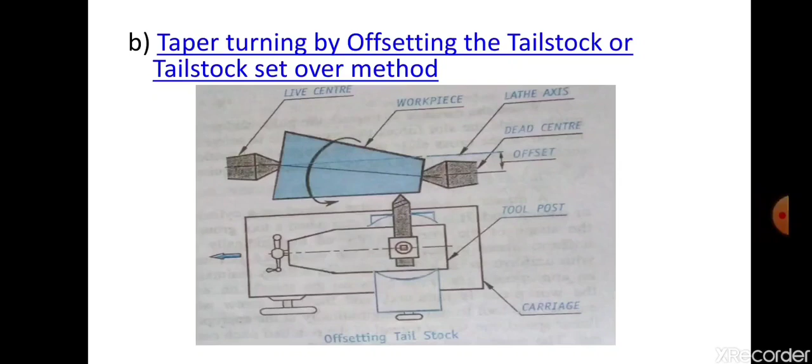Okay, specification of lathe. So what do you mean by specification of lathe? Specification of lathe means we have to give the details about the machine. For example, what will be the maximum diameter of the workpiece that can be fitted into the lathe machine? What is the maximum length of the workpiece that can be fitted into it? That is the meaning of specification of the lathe.

So for a given machine, what will be the minimum diameter? What could be the maximum diameter of workpiece that can be fitted into it? What will be the maximum length of the workpiece that can be fitted into that machine? So all these will tell you the specification of it. In addition to that, we can also say what will be the maximum speed at which it will rotate. Okay, so all these things will give you the specifications of lathe.

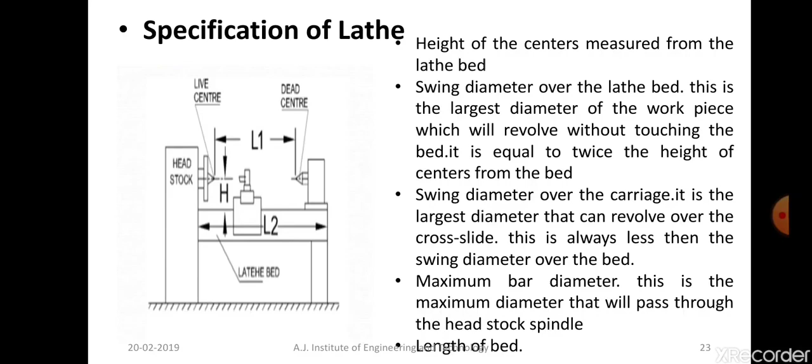Okay, so we will start with the milling machine. So what is milling actually? Milling is a manufacturing process in which the excess material from the workpiece is removed by a rotating multi-point cutting tool called the milling cutter. Okay, so you can see the difference between lathe machine and milling machine.

In lathe machine, as I've told you, the clear difference here, the workpiece is rotating. Workpiece is rotating, tool is stationary. Tool is not rotating. Tool is only made to move forward and towards longitudinal direction. Actually, it is moved by the carriage assembly. Tool will be stationary there, right? So you are feeding the tool against the rotating workpiece. That concept is lathe. But what about milling here?

In milling, as I told you, you have a revolving cutter which is having teeth, which is the tool actually. So the wheel is rotating, or in other words, the tool is rotating here, and the workpiece is stationary. So you are feeding the workpiece against the rotating tool, quite opposite to that of lathe, isn't it? In lathe, workpiece is rotating, you are feeding the tool against the workpiece. Here, the tool is rotating, you are feeding the workpiece against the tool.

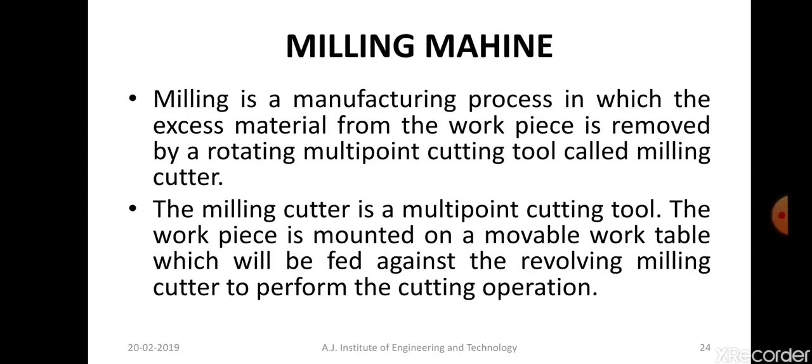Okay, so this is important. This question also is generally asked. What is the principle of milling? How milling is done?

So I have already explained this actually. So just in brief, I'll explain it one more time. The workpiece which is mounted on the table can be fed either in the direction opposite to that of the cutter or in the same direction of the cutter. There are two possibilities, isn't it? You have the work table, you have the milling cutter which is rotating. So there are two ways in which you can actually feed the workpiece into the tool. One,

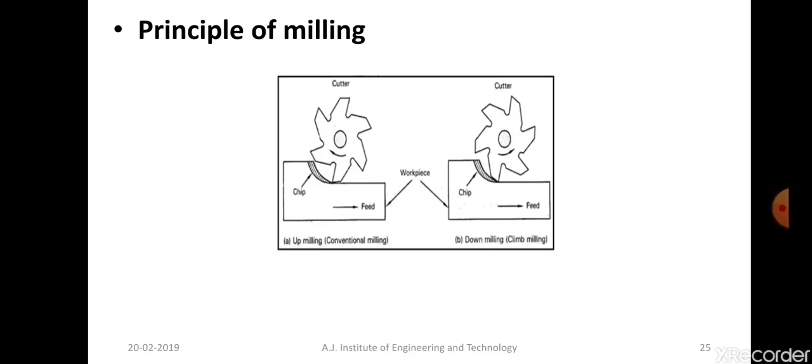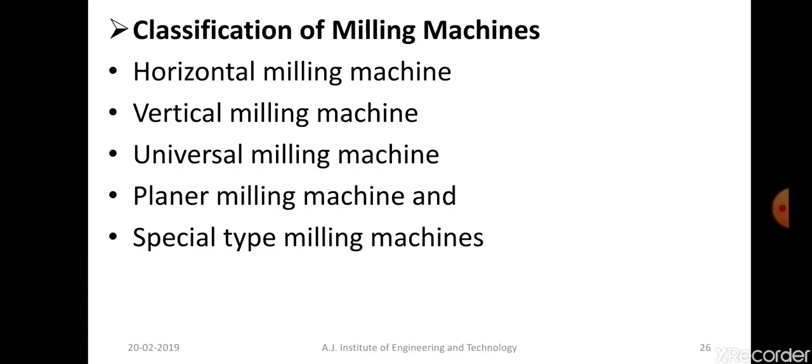Okay. So next we have classification of milling machines. There are different types of milling machines. The first one is the horizontal milling machine. The second one is the vertical milling machine. Then universal milling machine, planer milling machine, and special type milling machines. We are not going to study all of them, but in the syllabus you have to study the horizontal milling machine and vertical milling machine. Both of them are important. Generally one of them is asked in the examination, either horizontal milling or vertical milling.

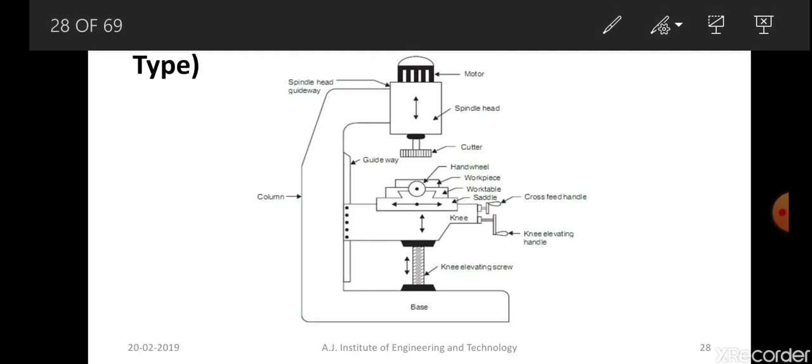So you have an elevating screw, so there is a provision to rotate the handle. There's a lever by which, when you rotate it, the whole of the knee can be lifted upwards and downwards. Okay, I hope you understand what I'm saying. So the whole of the knee along with the saddle and the table can be moved upwards and downwards.

That means when the milling cutter is rotating, there is no provision for the cutter to go up and down here. It will be rotating in the arbor itself, but wherever you want, the workpiece or the work table can be moved. That means the work table can be moved upwards till the cutter, so that the cutting action takes place. And there is also provision for the work table or the saddle to be moved in a linear direction also.

As you can see there, the arrow marks are suggesting that the work table as well as the knee can be moved in both the directions, right? So wherever the cutting is required, you will take it upwards first, get in contact with the milling cutter, the cutting action begins, and if you want to move it to the left side, you can bring it down and then take it to the left side or to the right side.

So there is a provision for the work table to be moving in the x-axis longitudinally as well as in the vertical direction. Both horizontal direction and vertical direction, the workpiece can be moved. So you are actually taking the workpiece and keeping it where the cutting action should take place. After the cutting is done, you will get it down. Maybe you want to move it to the left side and again bring it in contact with the cutter.

So you are actually moving the work table itself wherever you want, not the tool. In the case of the lathe, it was reverse. The workpiece would be rotating there itself and you are moving the tool wherever you want to go, right? Here it's absolutely reverse. The tool will be there itself, and the workpiece will be taken wherever you want to move it.

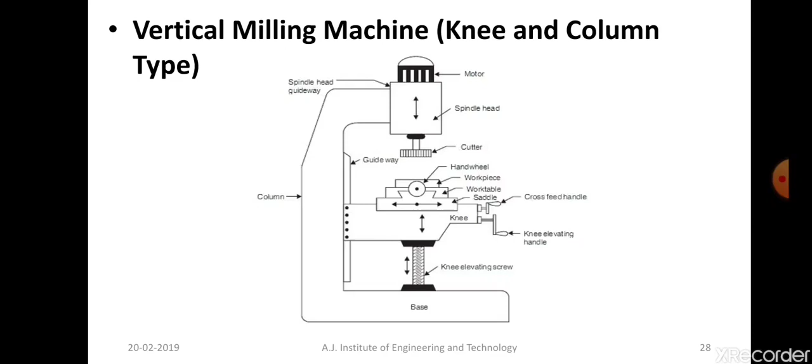Okay. So you have a base on which it is supporting. So the same explanation is what you have to give. The base will be supporting the entire structure. The column is usually cast into a single component. The entire piece is made up of one single component. The column actually consists of all these gear mechanisms, spindle or electric motor. Everything will be connected in the column itself. And also it enables to mount the table and other mechanisms onto it. Okay.

The knee can move, as I've already explained. The knee can move up and down with the help of an elevating screw. So the arbor explanation I've already given. Arbor is basically a horizontal shaft that is provided with a small tapered shank in the corner. You can see. Okay.

Next, knee. As I told you, the knee is a casting mounted on the front of the vertical side of the column. It can be moved up and down with the help of an elevating screw. The upper face of the knee is provided with guideways so that the movement of the saddle is also possible horizontally. Okay, so this is what you have to do. You have to individually explain all these parts.